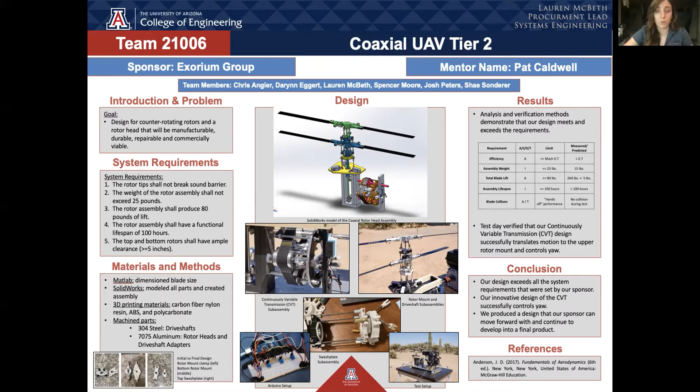Our team developed 5 system requirements. From these system-level requirements, we developed 5 functional requirement categories: performance, environment, safety, interface, and design features. Within these categories, we determined the rest of our functional requirements.

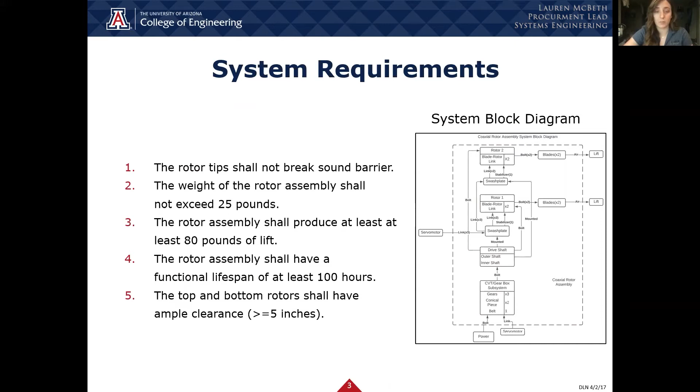The system block diagram was developed early on in our project. The dotted line represents the system boundary. The external elements are power and 4 servo motors, and lift is our output.

We did 2 trade studies, one for the transmission and one for the rotor blade mounts. We went with the CVT because it varies the rotor head speed instead of varying the rotor pitch, which eliminates additional airflow complexities. It also improves the system efficiency and allows for finer control of yaw speed.

Moving on to the rotor head study, our rotor heads use only 2 blades to simplify the design, minimize the number of linkages required, and be lightweight.

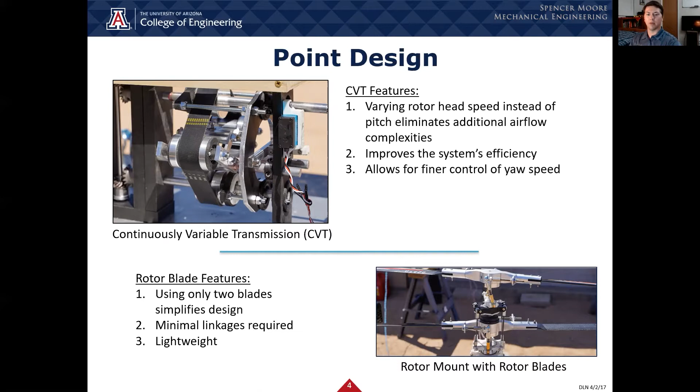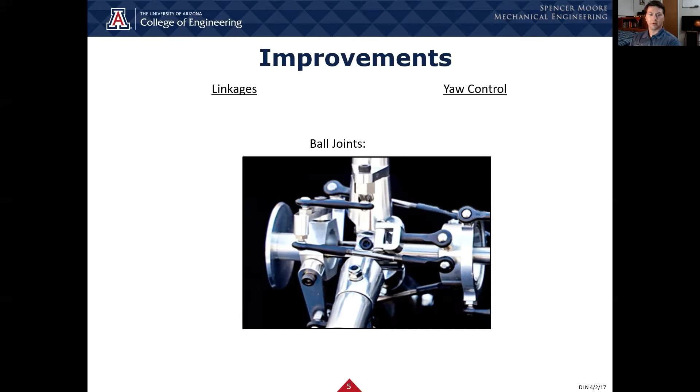Our design was roughly based on a smaller hobbyist drone, but we made improvements to the linkage and yaw control designs. The model uses cheap plastic links prone to breaking. Our assembly uses Heim joints to be more robust while still offering the same number of degrees of freedom.

Moving on to the yaw control, the model uses a variable pitch design, but that causes less efficient and more complex airflow. Our assembly yaws using a variable speed design, where the top rotor can spin faster or slower than the bottom, which turns the UAV left or right.

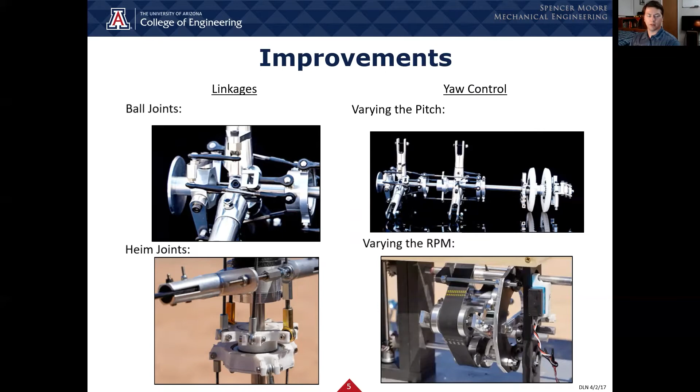Our assembly is the only coaxial rotor head design to use a CVT to vary rotor speed to yaw in this way. After the design was brainstormed and analysis performed, we produced the model in SOLIDWORKS to minimize costly mistakes.

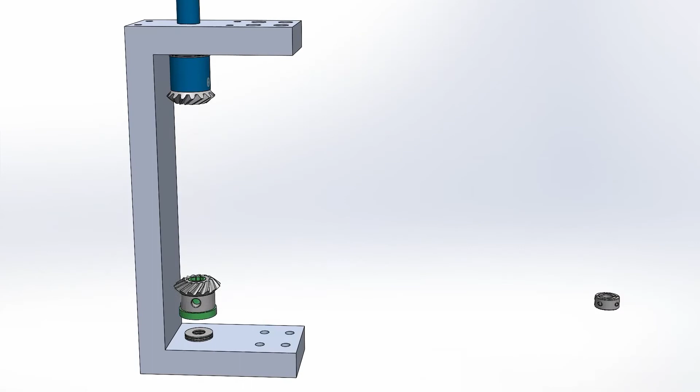We assembled all the parts and hardware before procurement to ensure that they fit together without any collisions or interference issues. Also, since ease of repair was a core requirement, we used these models to establish quickly removable subassemblies. These subassemblies can then be worked on without being attached to the vehicle or replaced in full to allow the UAV to be put back in service as soon as possible.

Once the assembly was put together, we tested the motion of the swashplate assemblies.

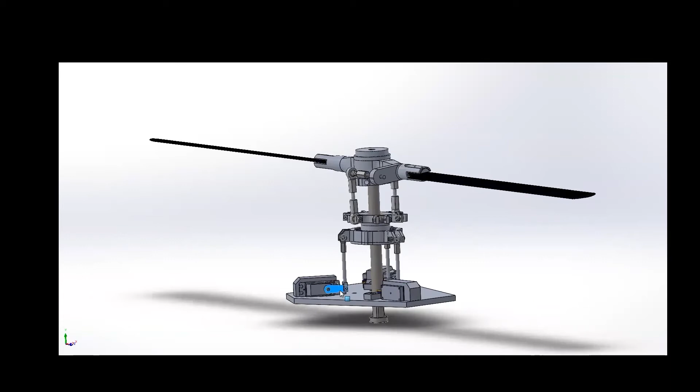The control of the blade angle begins with 3 servos oriented at 120 degrees around the drive axle. These servos actuate up onto the lower swashplate, which gimbals about the drive shaft and produces the same degree of tilt to the pitch connector links. This angle is also translated to the upper swashplate to achieve identical pitch for the counter-rotating blades.

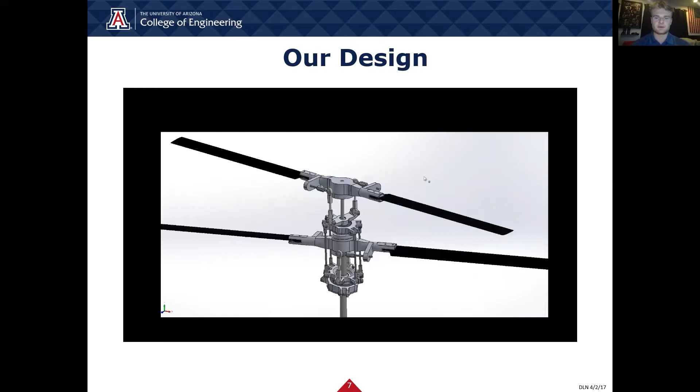Before we fabricated the parts out of expensive, high-grade materials, we conducted further prototyping with cheap 3D printed parts to verify that the SOLIDWORKS model satisfied the design requirements.

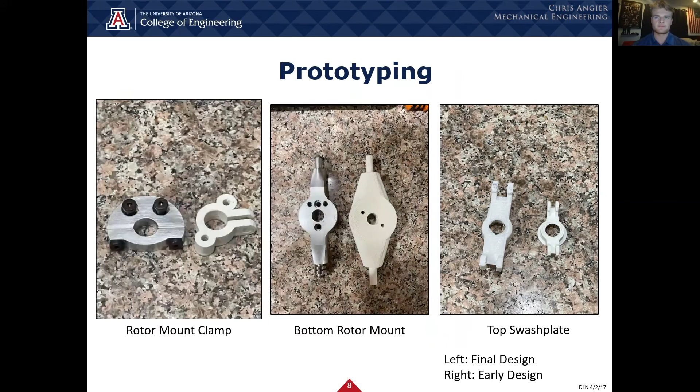We found that the rotor mount clamps needed a stronger design. The rotor mounts were too big and interfered with the swashplate links, and the top swashplate needed to be enlarged to have enough clearance about the Heim joints.

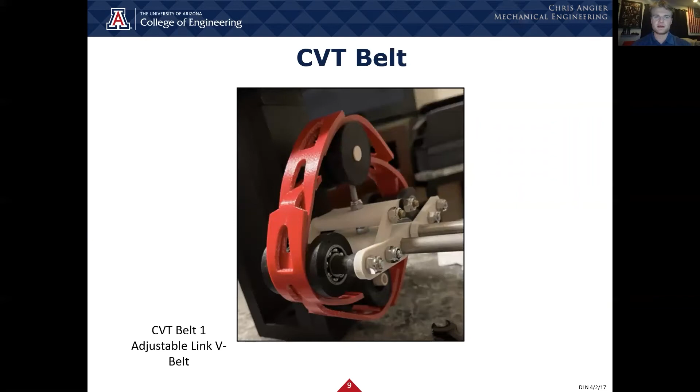We tested 3 different types of belts to see what best could transmit the large amount of torque that the UAV required. The first was a V belt, but it proved to be too stiff, too tall, and too bulky. The second option was a conveyor belt, but we found it to be too rough around the edges and too difficult to work with due to the alligator clip catching on the pulleys.

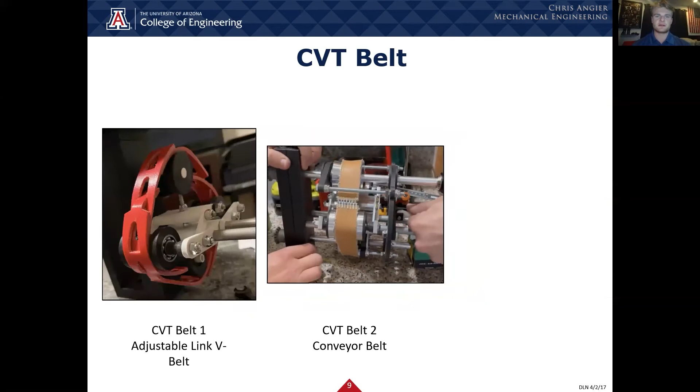The third option was the serpentine belt, which offered the most optimal length, width, and height, and thus resulted in the best performance.

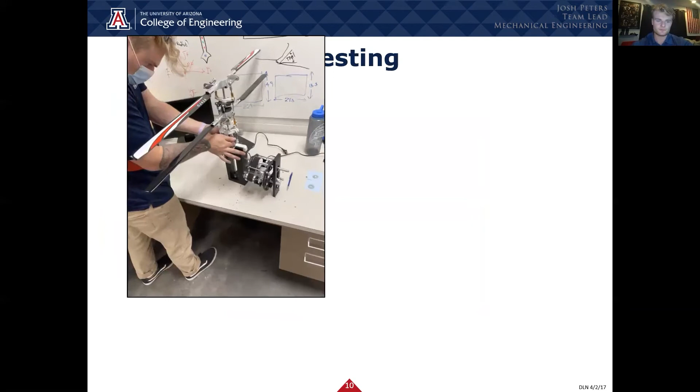Our test date was April 10th. Our full assembly was put together and the subsystems were integrated.

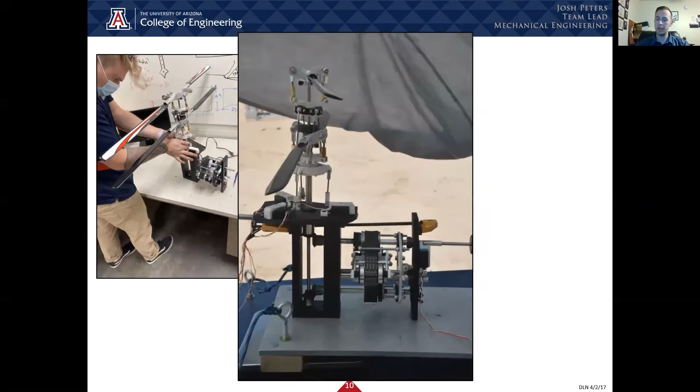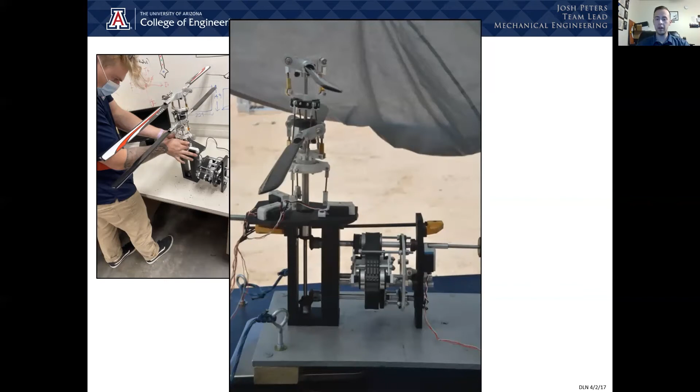2 days before our test date, our sponsor got called away to attend CEO responsibilities, and he informed us that unfortunately he would not be able to supply his portion of the assembly that we had originally planned on utilizing to test our design. The situation we then found ourselves in kick-started our creative problem-solving skills into overdrive.

In less than 48 hours, we were able to attain an electric motor at no cost, build an entire test stand for less than $50, and develop a working controller to operate all of our servo motors using an Arduino.

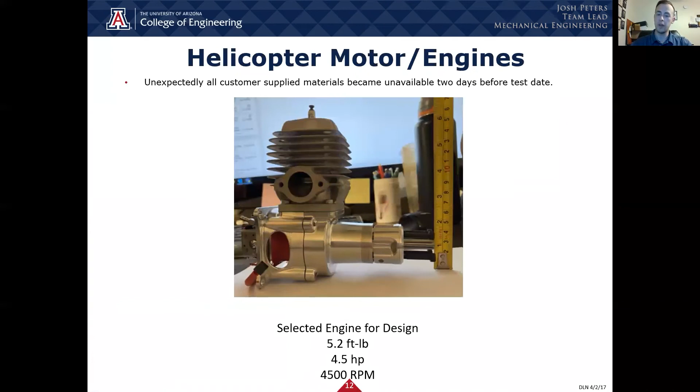This is a picture of the engine we designed our entire assembly off of. This is an electric motor that we were given that turned out to be underpowered and nearly burned up. Our goal for the following week was to acquire and integrate a more powerful gas-powered engine with our existing test stand.

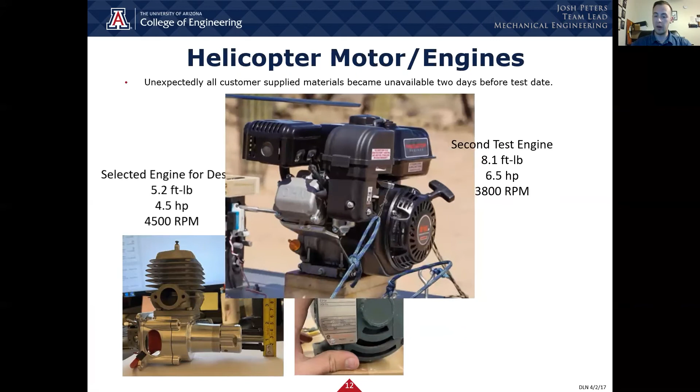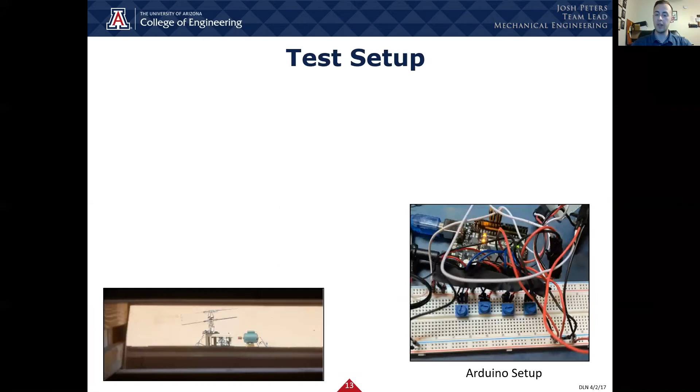Our circuit was run through an Arduino Uno, which we used to utilize potentiometers to move the servos. We observed our test safely from behind a wall, and in this video, the servo motor can be seen moving the swash plates and varying the pitch of the blades.

This video shows the assembly functioning as intended. We were only able to run the motor for small increments as it was overheating. The RPM provided was not enough to power the system through both demonstration and analysis. Despite our issues with the motor, the rotor head assembly did run smoothly.

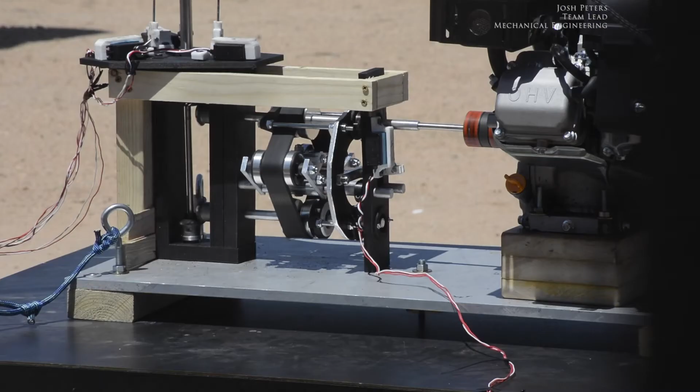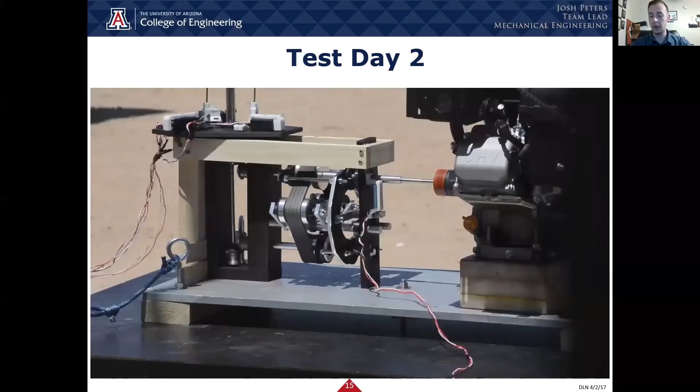This video shows our functioning CVT system. The servo motor was successfully able to open and close CVT pulleys, varying the speed of the rotor blades relative to each other. Here we notice that the bottom rotor blades were running slower than the upper rotor blades.

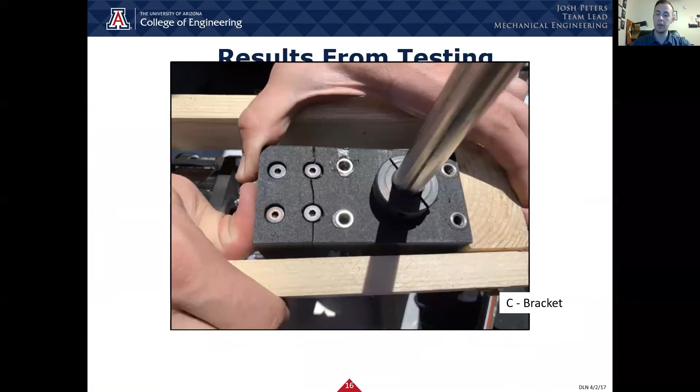Upon inspection, we found that the 3D printed bracket holding the gears in place had broken. This caused our gears to shred, as you can see in this image. However, we are confident that if this piece was machined, it would have prevented this issue from occurring.

After fixing the bracket and the gears, we tested again. With the full load of the system, the motor was unable to start due to the amount of back torque of the rotor head assembly. However, the planned final design incorporates an engine starter.

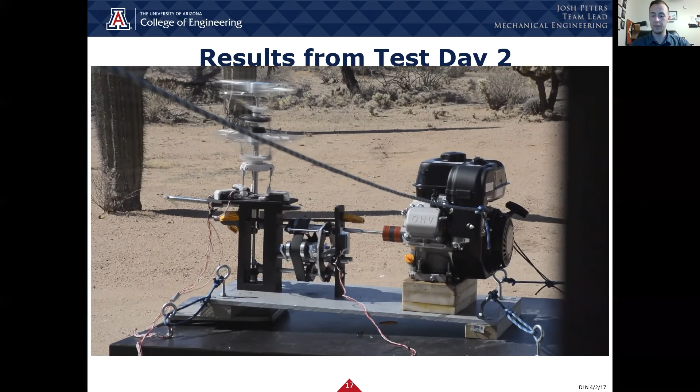We decided to take the lower blades off to lighten the load on the motor. Due to removing the drag of the lower blades, the links bent and the swash plate fractured. This issue would have been solved by machining the swash plate and using all the blades in the system.

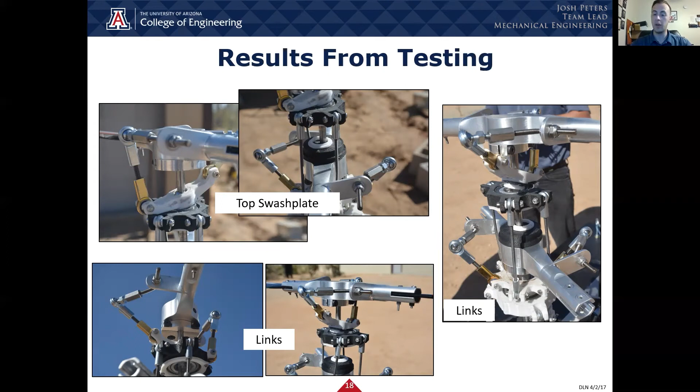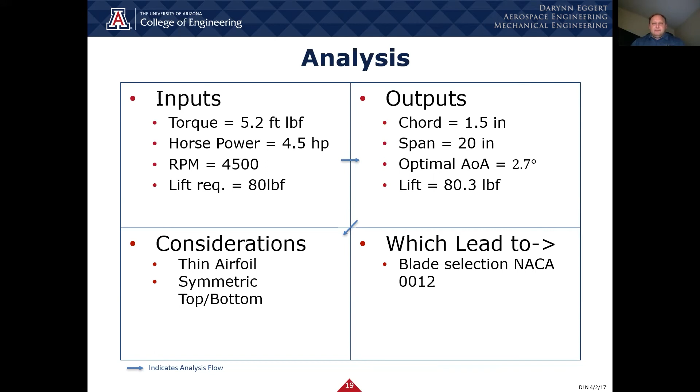The analysis that was performed helped drive the design of our rotor blades. We were able to use provided engine specifications, such as torque and horsepower, to calculate blade dimensions, such as chord and span, by making a couple of assumptions, those being thin airfoil and symmetric airfoil. This led us to decide on 2 blades per rotor with a NACA 0012 airfoil.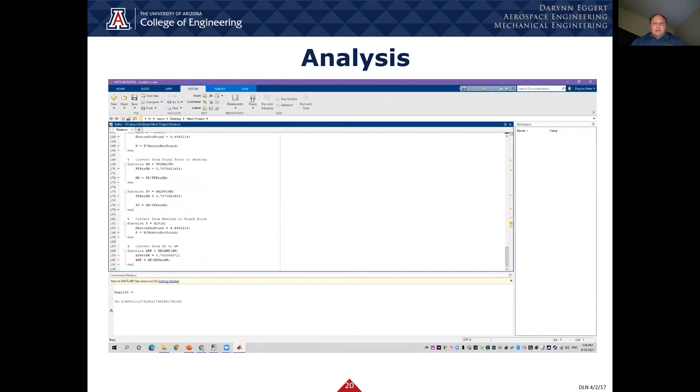The analysis was performed in MATLAB using lift and drag equations, as well as a little calculus to find those values. The utility of this code also provided us with the pitch angles our blades needed to produce lift. As such, we were able to reverse this code to help verify our testing on test day. There are a total of 13 requirements that we had to verify.

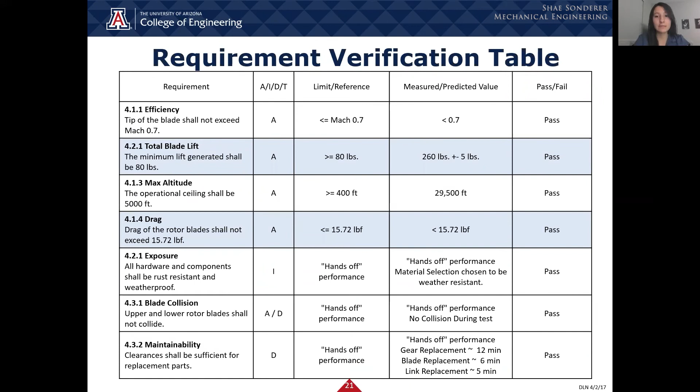There are a total of 13 requirements that we had to verify. To name a few, we have the total blade lift, drag, the assembly weight, and the stall angle. Through the analysis, inspection, and demonstration that we were able to conduct, we concluded that our design would work. Our verification supports that with the correct motor, generator, control system, and fully manufactured parts, our design would fly as intended.

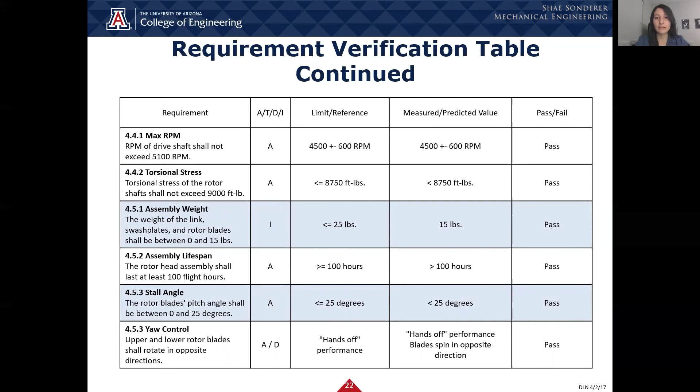By May 6th, we will deliver to our sponsors several items, such as the acceptance test procedure, our SolidWorks models, and the analysis that goes with it. And lastly, we'll deliver the prototype.

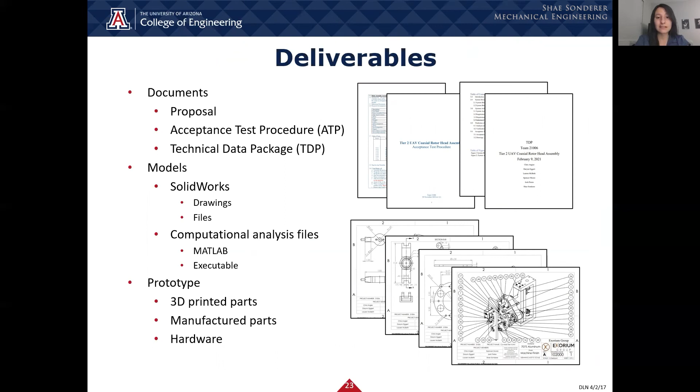During the project, we overcame several challenges. Problem 1 was the feasibility of our system, given the initial engine that was chosen for the design. Our sponsor purchased an alternate engine to design around. We simplified the design, but we were not able to fabricate all of our parts, so we relied on 3D printed parts, which required several modifications to the design.

During integration and testing, we discovered issues with the design due to the compressed timeline. We quickly responded and adjusted our design accordingly. A lesson we learned was a process that goes into an engineering design project. Another lesson was to expect problems to arise during different phases of design and testing.

Despite the challenges we faced during the project, we successfully designed and built a prototype that meets and exceeds our requirements, and is ready for a sponsor to move forward into a final design.